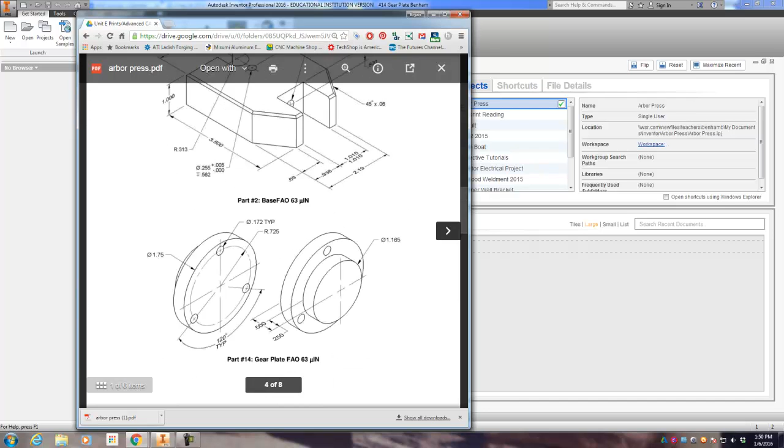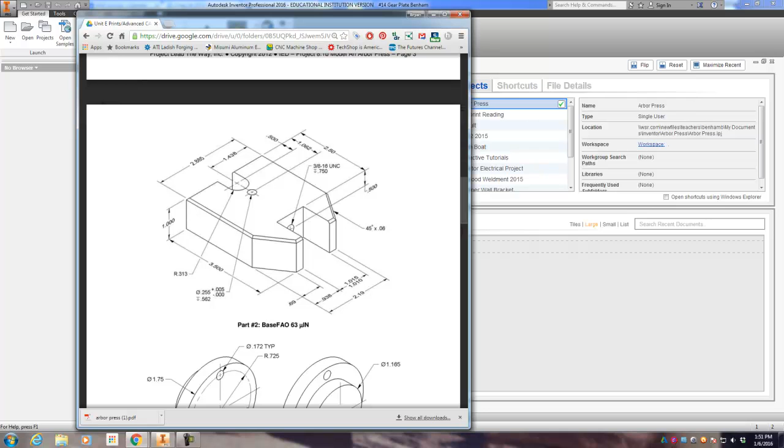All right, next part up, number two. Let's take a look, see at this. It is the base that the Arbor Press is all going to fit onto. Looks like it's going to be one whole extrusion with a very unique shape and a lot of dimensions. And then we'll have one hole here, which is a separate sketch, and another hole here that's a separate sketch, and then just one chamfer that will do these two sides. So we got quite a bit of things we have to look at on this print.

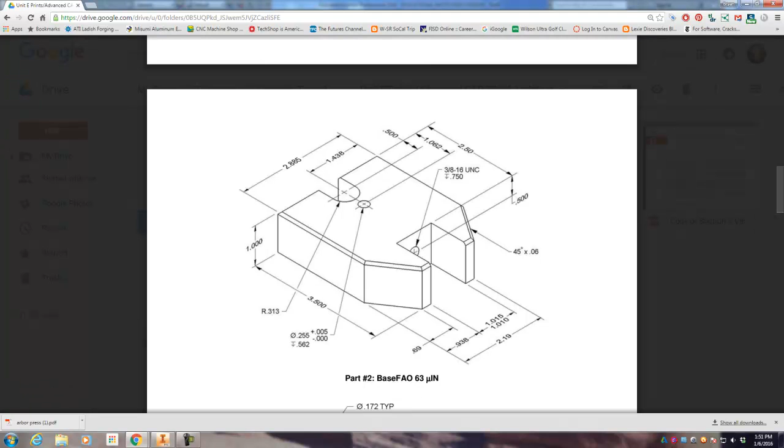Let's get after it here. We're going to start a new part file, get my print up here, start a 2D sketch. Now if you look at this print, you'll notice this is kind of the top view that has the whole thing. Usually we've been doing everything in the front view, but I think for this one it's going to be our best bet to select this XZ plane. When I do that, you can see the word top gets kind of goofy, so if you click this button once over, that'll rotate it so you can read that word correctly and make things a little easier.

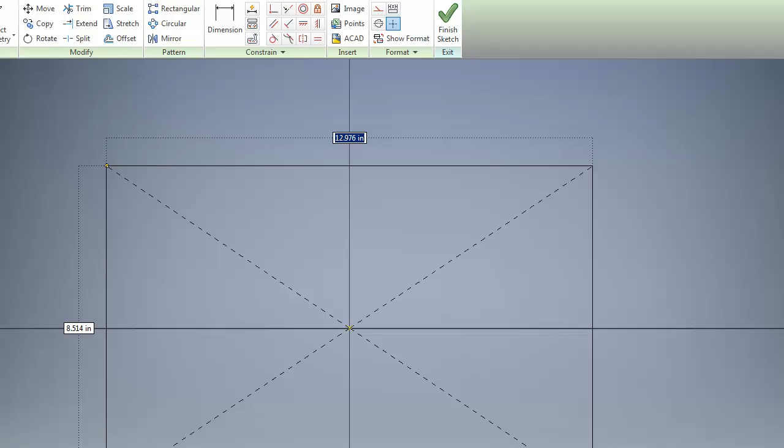All right, I'm going to select a 2-point center rectangle, start from the origin, spin this thing out. Looks like my first dimension, if I look at the print, is 3.5. I'm just going to make a rectangle. Tab, 2.885 - so that's this guy. So that's my outside of the part.

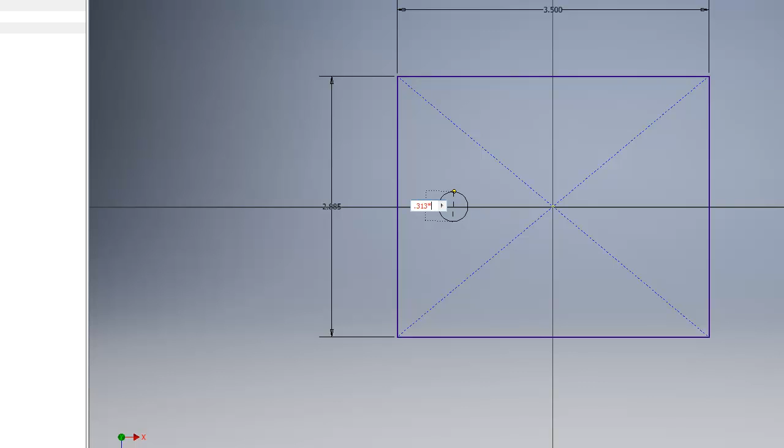Next I'm going to work on that circular cutout on the back side. I'm going to put a circle in here that's centered here. It looks like it says on the print that the radius is 0.313, but that's a radius, so a diameter is the radius times 2. In Inventor I can type in a radius and do the times sign on the keypad, so that's what you're looking at there. 0.313 times 2, and then just hit enter, and that'll equal that out to 0.626. I mean, you could do the math if you wanted to.

Next I'm going to go ahead and place the dimensions necessary to locate the part correctly. Well, I already have that one. I guess that's in the middle, but it says on the print it's supposed to be 1.438. Okay, and then from this to this side right here on the print says 0.5. And once I have that done, I'm just going to go ahead.

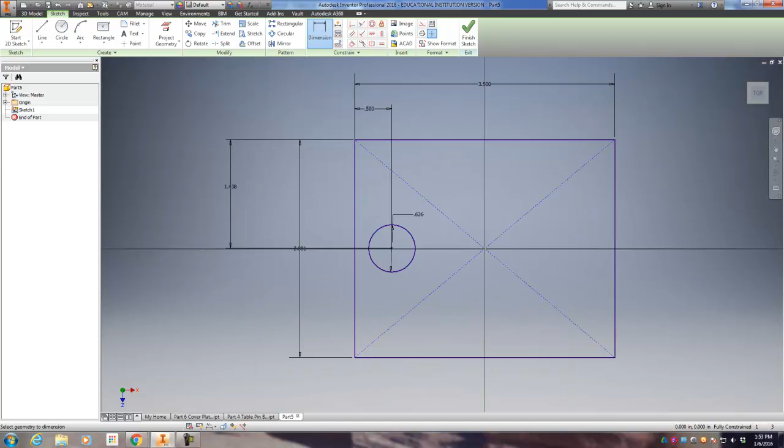I'm going to draw two lines that will actually, if I zoom in right here, you'll see it'll snap right on this little top quadrant of the circle. And then I'll make that line horizontal so it snaps like that, and I'll snap right on that line right there. Do the same thing on the bottom until it snaps in place. And that's good - so what I did was I kind of sketched out what that slot will be like.

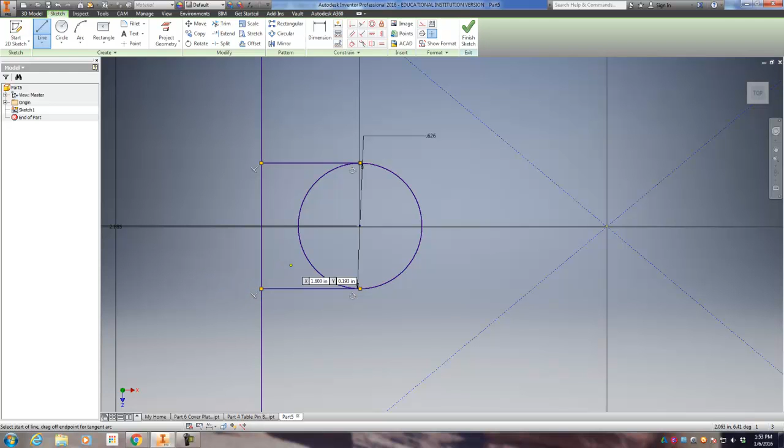Of course, I don't need this middle stuff anymore. And if you guys remember from the day I talked about some modify commands, this trim command is pretty sweet. So I'll click on this and take that part of the circle out because I don't need that. And I also don't even need this part of that rectangle, so I can get rid of that. Okay, so the back side of this is done.

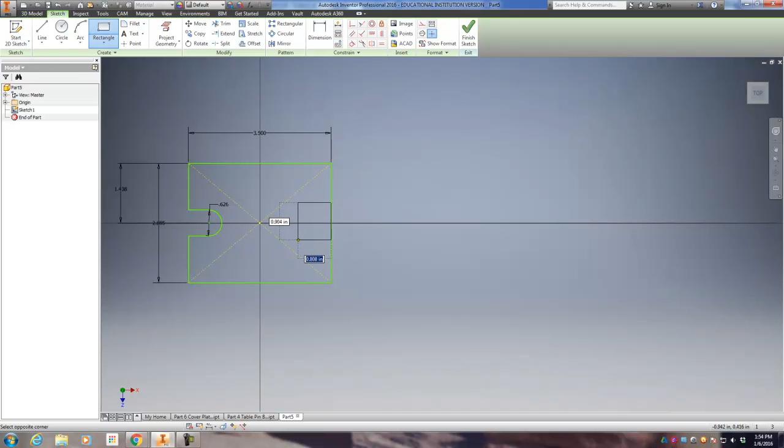Let's go ahead and put a little rectangle in here for that front cutout. So we'll switch back to a 2-point rectangle, and we'll just kind of click that guy. Just off the top of my head, I'm not looking at those prints, so I'm just going to click and make a random rectangle, and then dimension it now later. So that's another option whenever I'm making a rectangle. It looks like this inside slot of this rectangle could be a couple different dimensions, so we're just going to go ahead and pick that top side of that dimension.

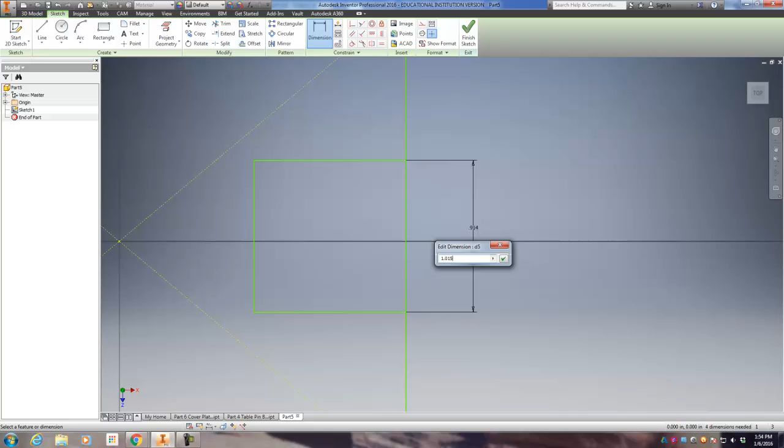1.015. All right, looks like it has a location from this edge to this edge. On the blueprint it says 0.938. Okay. That is about it for that. That should locate the rectangle, should tell it there, and then we just need to know how deep, how far in this rectangle is going to go right now.

So basically I'm going to take a look, see at this guy, and say, all right, well if the overall is 3.5, this dimension is 2.5 over. So I'm just going to click dimension, select this line and this line, and type in 2.5. And then that's going to bring that distance from there to there in. So now I have that rectangle area all good to go.

And again, I don't need this part anymore, so instead of hitting trim, I'm going to hit X on the keyboard, which activates that trim command. And then I'm going to trim that middle out. Maybe I'll trim that so it gives me some extra things, so I'm going to get rid of that stuff too. Okay, so we're good there.

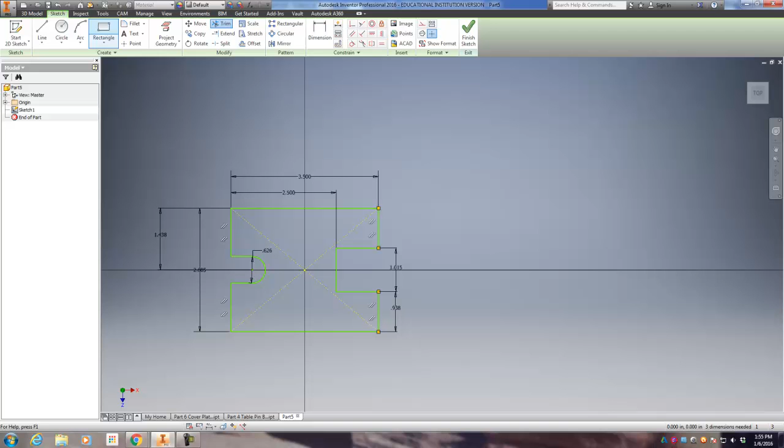And now the only thing left to do is these little angle guys. So let's go ahead and click on line. I'm not sure exactly where this needs to go, so I'm just going to kind of place it randomly, kind of like that a little bit. So to me, the dimension that it gives me is a dimension from this point of that line down to the bottom, and it says it is 2.19 if you look at the blueprint. So that moves that away.

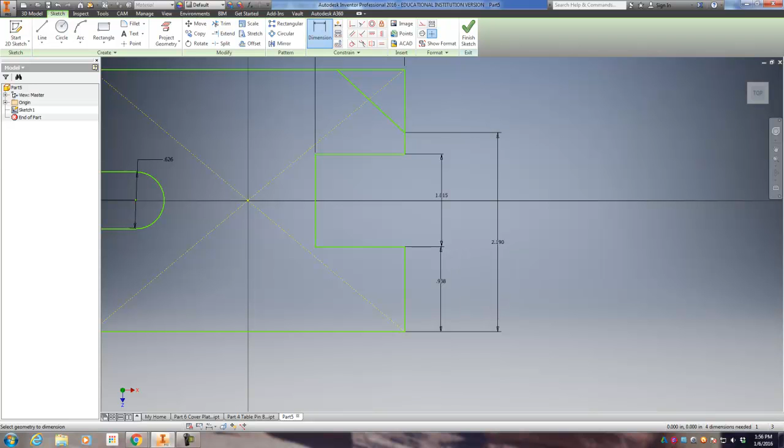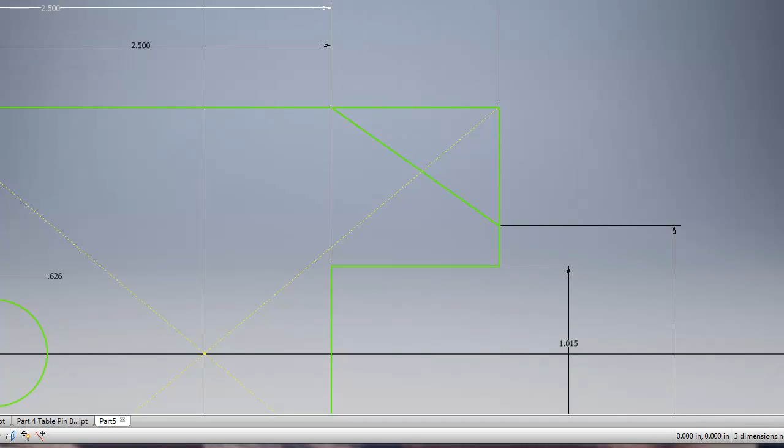That's good. And then it says this, and I'm very particular - see, I'm not selecting this line or this line, I'm actually selecting the little point right there. Might be kind of hard to see, but then I'll hit this other line over here, and that appears to me to be 2.5 away as well. All right, so now you have the location of that little slot done.

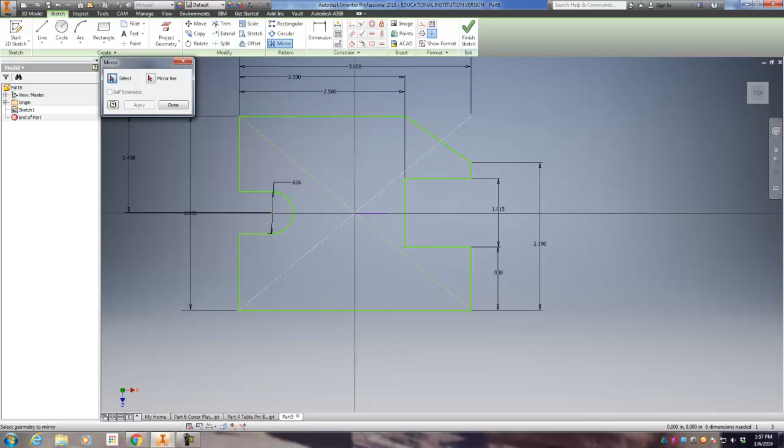And honestly, you can go ahead and just hit this trim command again and get rid of this part and that part. And I could do all the dimensions again over here, but remember that mirror technique I did? I'm going to create a line just from the center, and it just needs to be a horizontal line. I right click and hit OK. Then I'm going to come over to mirror, and select this line is what I want to mirror. The mirror line itself was the one I just made. Then I'm going to hit apply, and you can see it puts it down there. Done. Trim away the rest of this.

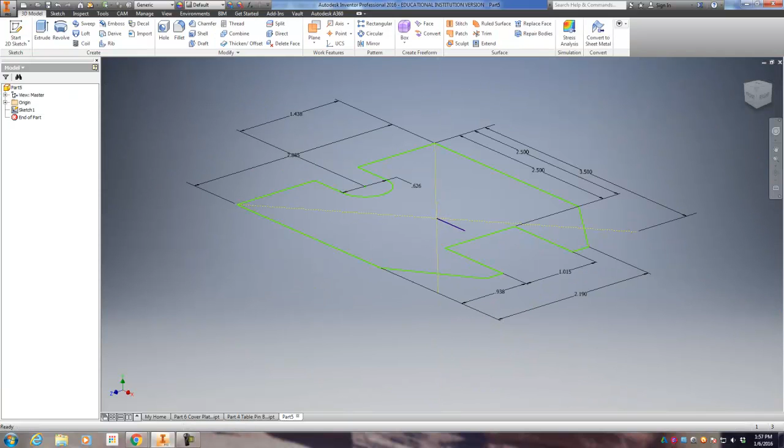And we are left with everything fully dimensioned on our first extrusion. So we can hit finish sketch, extrude. This part is how tall? 1 inch. So there you go, 1 inch is good. And accept.

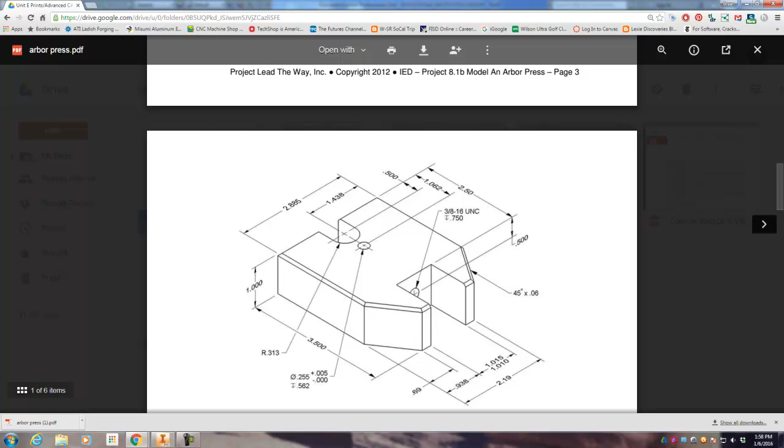And so now we have this cool base, but we need to put 2 holes in it still. If you remember, we need this hole, we need this hole. These are 2 separate sketches. This is just a normal hole with a certain depth - that's the symbol for depth, by the way, little guy there. And then this one is a call out for a threaded hole. So again, 2 things I showed you earlier when we went over some Inventor stuff.

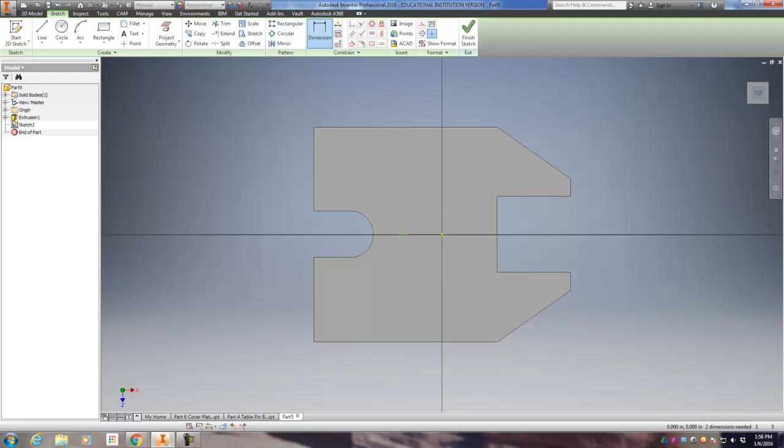So let's do that. Let's do the regular one first. We'll just click this face, hit the little new sketch button. Again, I'm going to rotate it just so I can look at it the same way I'm looking at the blueprint, that's why I'm doing that. I go to point. We know it's lined up somewhere in the middle, so we'll place it there. We'll go with our dimension tool. And to me, it looks like this point from this edge is, what do we got? 1.062. Enter. Looks good. Finish sketch.

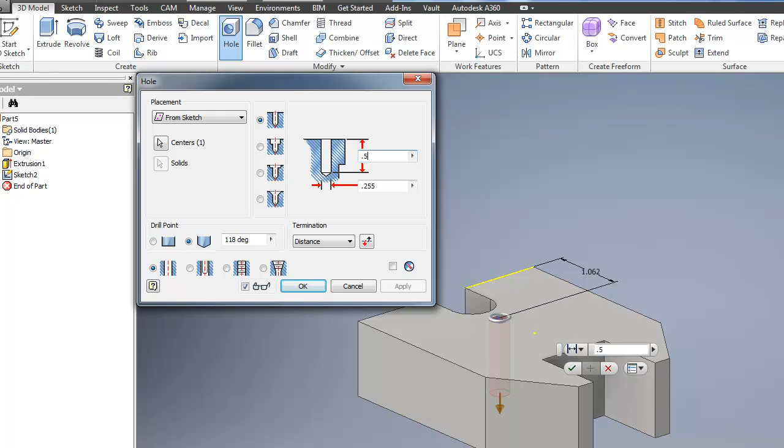Hole. See how it pulls that hole already out of there? Now this is a normal hole, but it is a diameter of 0.255. And you might have to do distance right here, I think it defaults to through all. So you want distance, so 0.255. And the depth is 0.562. And then we can hit OK. And now we got that hole in there.

Alright, and if you look at it, you can kind of see that hole, it's kind of hard to see from that angle, but anyway, that hole doesn't go all the way through.

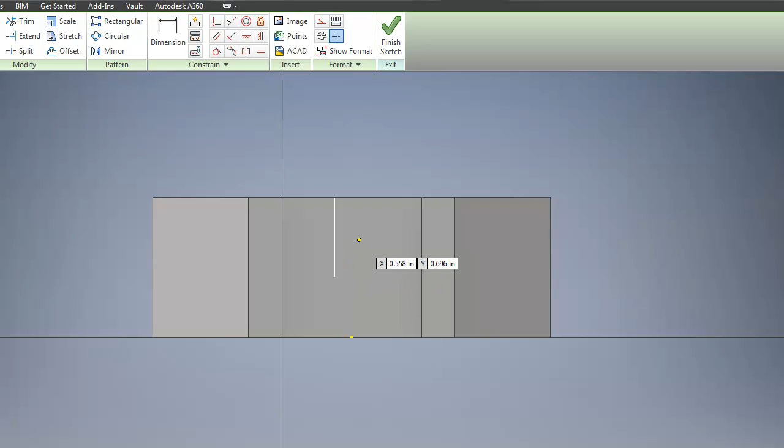Alright, next we'll select this face, create a new sketch here. Again, we'll need to put a point in here. We're not exactly sure location-wise where that's supposed to be, but it's 0.5 from the top, so I'm going to have to guess that it comes from the center right here. So we're going to place that guy there, dimension, top to the point. That's 0.5. Oh yeah, so it's centered perfectly in between there because that was 1 inch thick. So that's good there. Finish sketch.

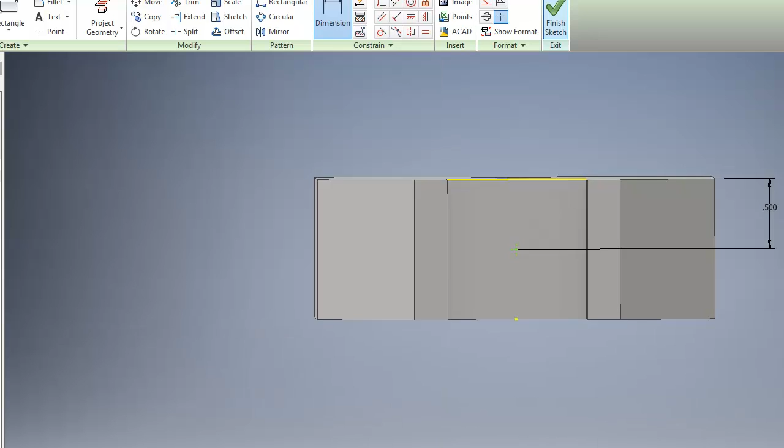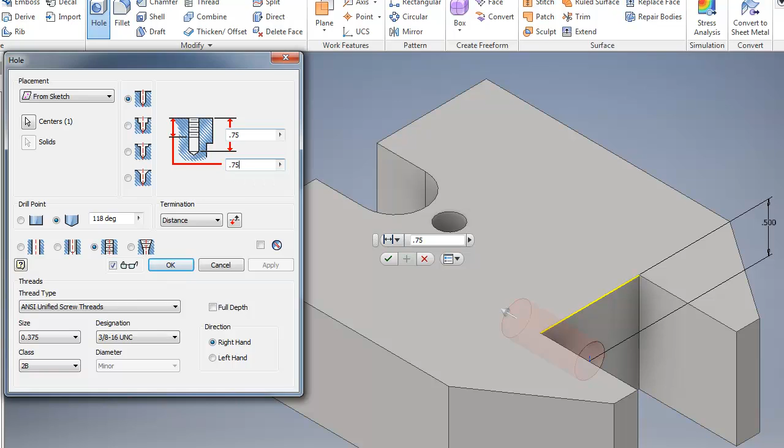Hole. Finds that hole, but this time we're going to have a tapped hole or a threaded hole. So I'll click this and it gives me some thread types. It says on the print that it's 3/8, so 3/8 as a decimal is 0.375. This automatically populates the 3/8 16 UNC, which is what it says on the print. So the only thing here is we just need to tell it how deep to go. And it says on the print, remember that depth symbol I was talking about? It says 0.75, and we make these two numbers match, so the threaded hole goes all the way down to the bottom. Sometimes we drill that a little larger, but in this case we're just going to keep them both the same. Hit OK, and now you can see you got that nice threaded hole, exactly how it needed to be.

And I have two more things that I need to do here. I need to do my chamfer technique, where I'm going to click this edge, and that edge. That's a little too big, so we're going to change that to the normal size that it says on the print, which is 0.06. That looks better. We're also going to pick these while we're at it. And that's it, hit accept. And now you have your chamfer around all your edges.

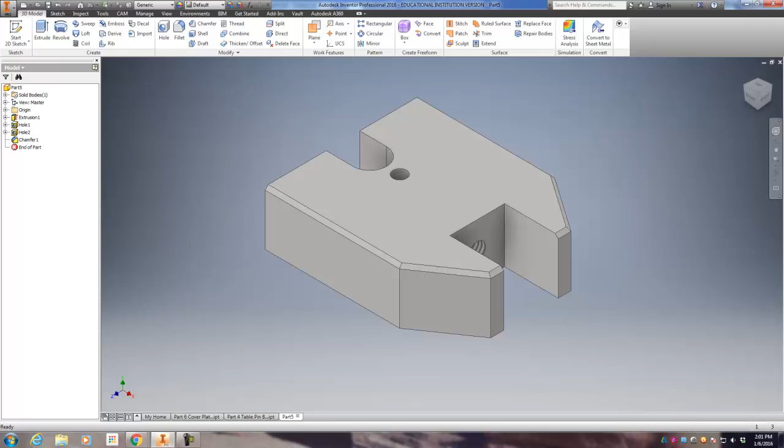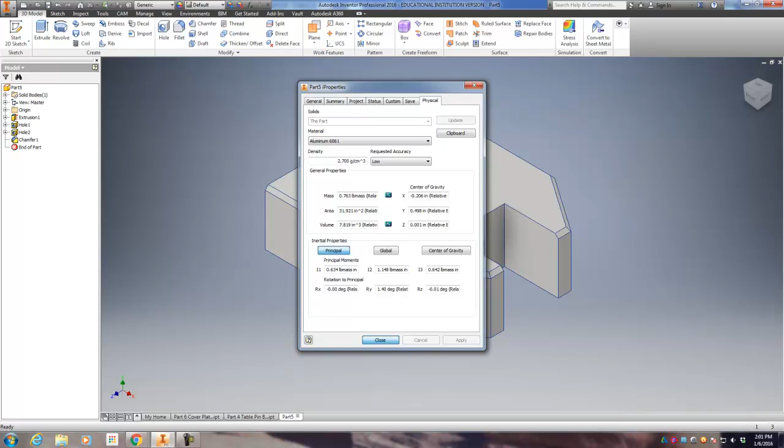What's left? iProperties, physical. And part number 2 is the base. What is that made out of? Aluminum 6061, so same stuff we've been using. Apply. This one's a little heavier, but it's still under a pound. Hit close, and you're ready to save that bad boy as part number 2, I believe that's what it was called.

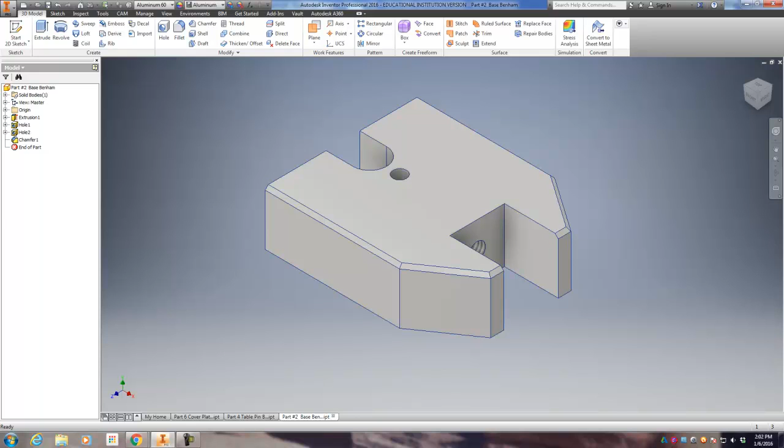Look at my blueprints again. Yes, it is - part number 2, base. Benham. Save. Nice job, I know that was a pretty long tutorial, but this is a pretty hard part, so if you can get this thing knocked out, you'll be doing real good. So, good job, you guys.